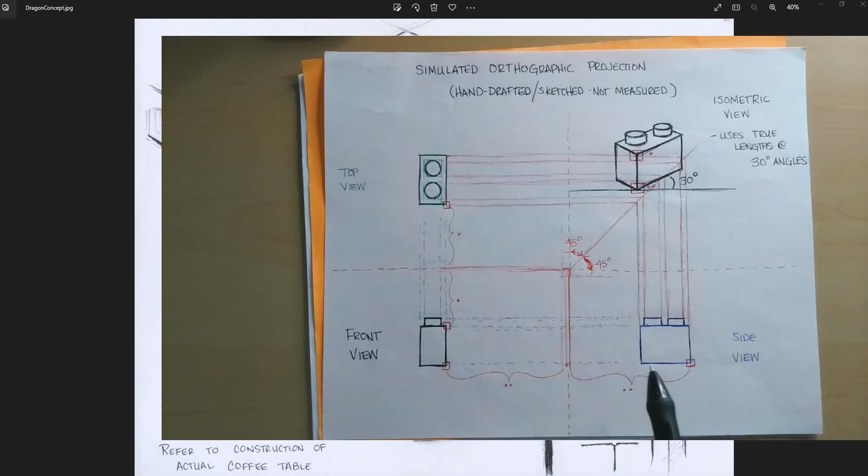So the whole concept of orthographic projection is it has three views to it: the front view, the top view, and the side view, and everything lines up through these three panels. Basically, if you took these three panels and folded them in, you would have the object sitting in the middle, with the projection screens and everything.

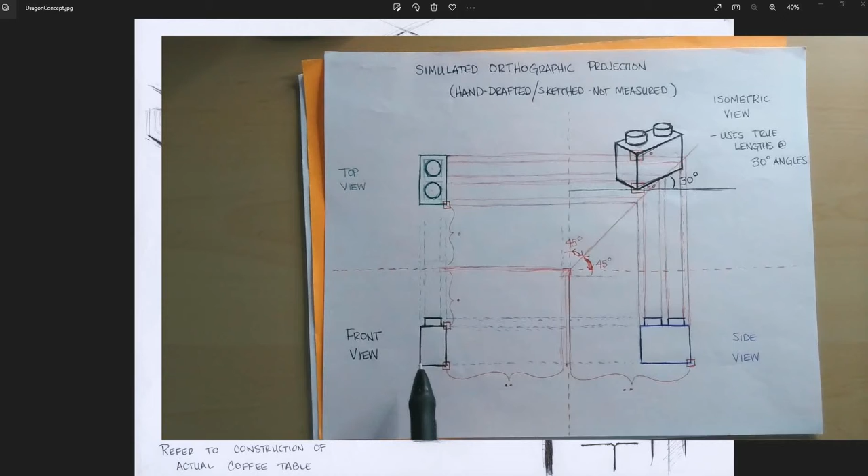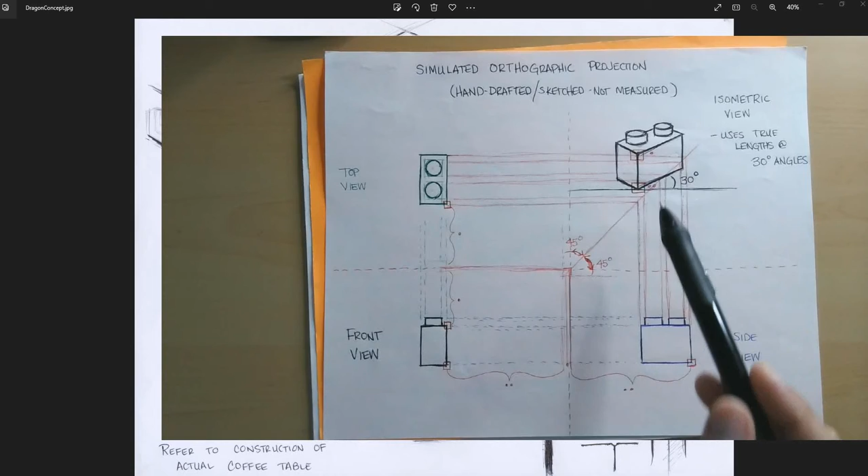One thing I'll show you in class is using acrylic to see how it actually projects to that plane, because that's a big key component. The front view is the front of this object, the top view is a flat version of the top, and the side view is a flattened version of the side of the object.

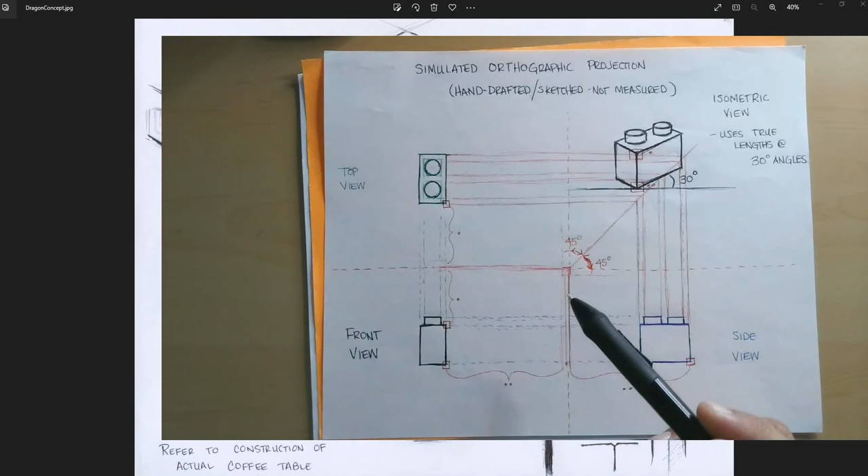Basically it's projected out to a plane in all directions, and the last component of an orthographic view is often doing an isometric view as well, so you can see that version of it. This is when you actually have a design document, you'd have these three views, and then you can have an isometric on it.

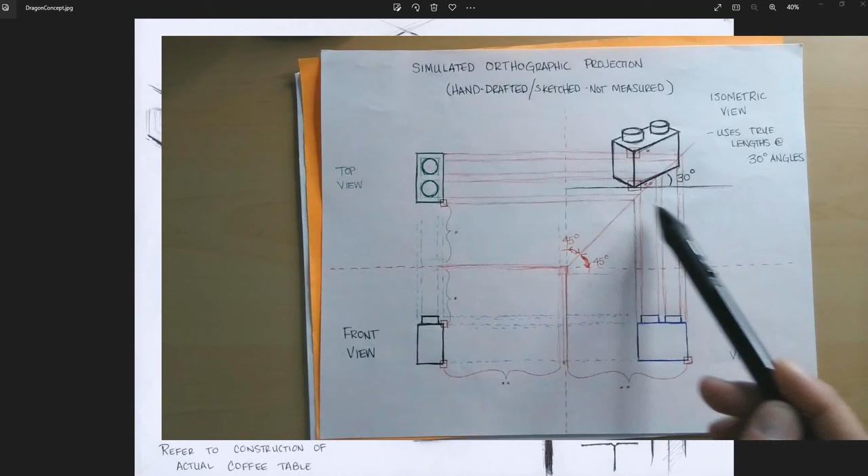The isometric is very specific as well, because with the isometric, these lengths are actual true lengths, and it's set up to where you have a 30 degree projection and stuff like that. It's really important to understand how all that's set up and how that looks.

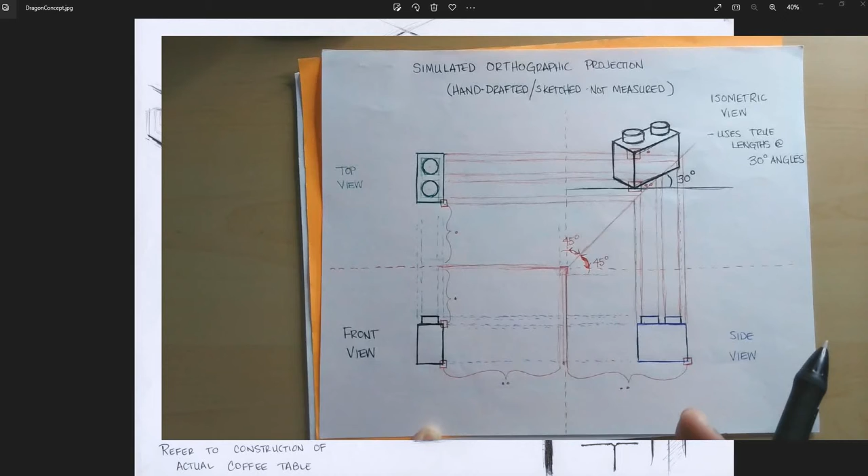As you create this, you'll notice that as it goes through, specific distances and lengths are all equal. Like you notice how this is equal to this right here, because it lines up to the corner of how it's actually folded, and that controls the imagery of it.

This corner is the same as this corner. This bottom corner is the same as that bottom corner, because that distance from there is the same as that distance from there, and that's how you actually line everything up.

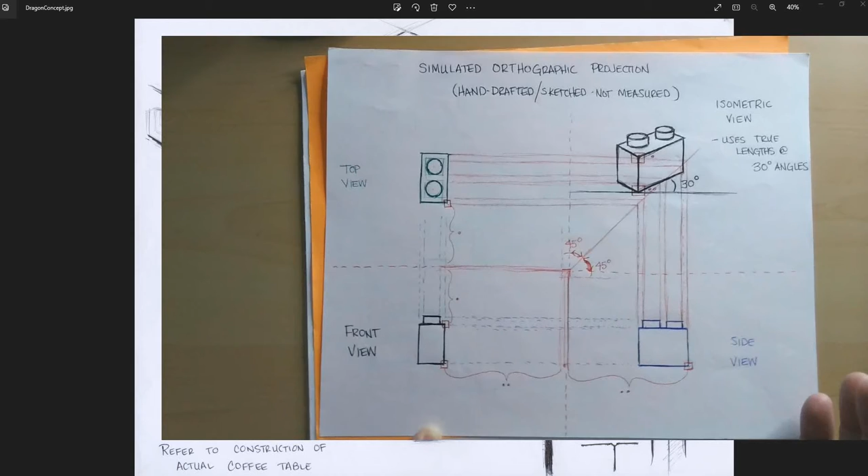Now, granted, this is all kind of sketched out, but if you want to know a little bit more information about it, we can actually sit down and go more in depth about it.

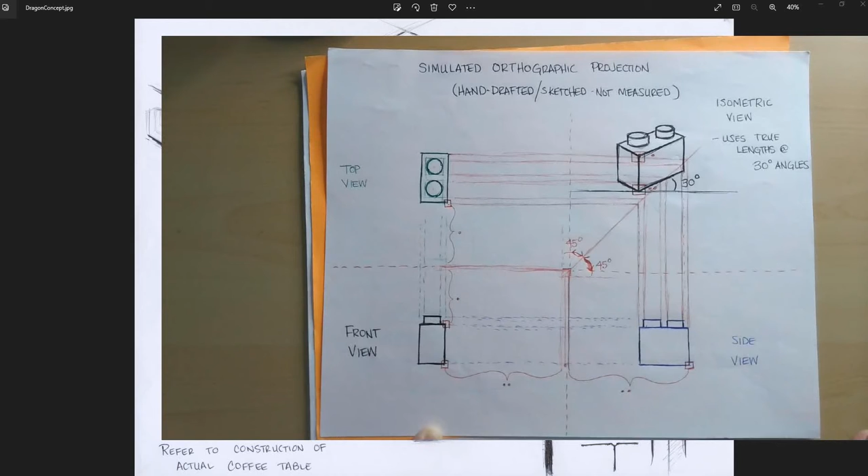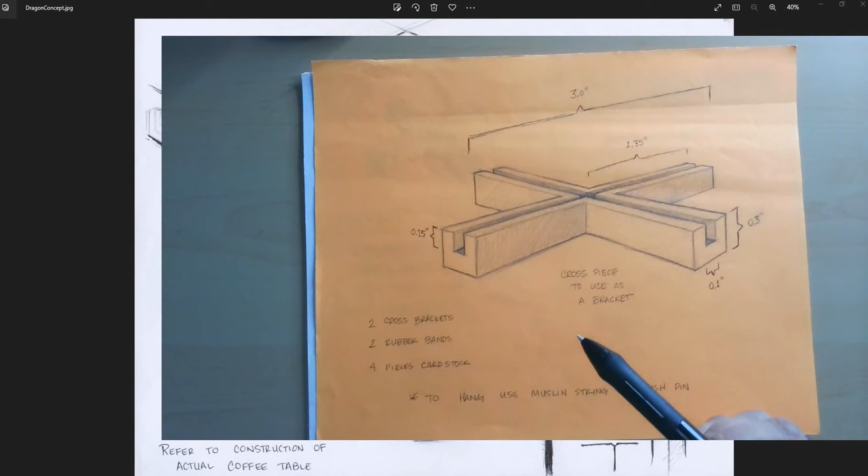The important thing to know about orthographic views is you can take them in the sense that you can make them a little bit more aesthetic. So there's that thing that's hanging down, and it actually has a little piece. I call it like a little bracket for making mobiles. But I came up with the concept so I could actually CAD it out.

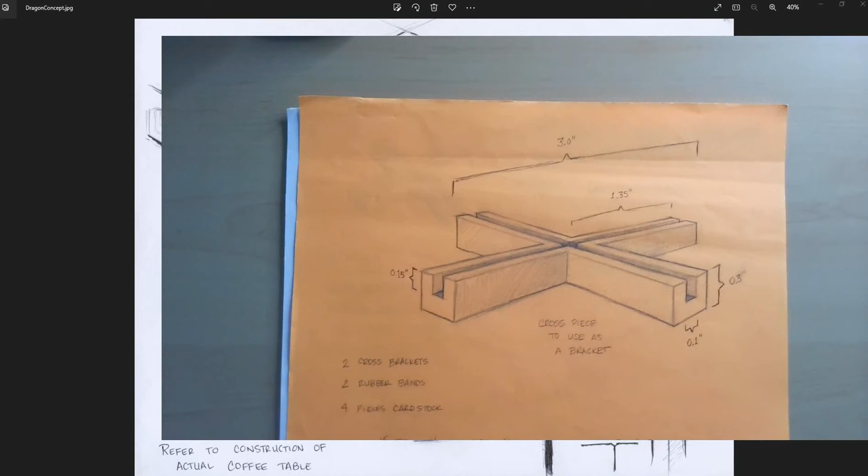So this right here is kind of like a more stylized isometric. This shows that bracket, what you can physically see that's on the mobile hanging in the classroom there. This is the direction you can take this concept of taking an isometric view from an orthographic projection, so you can make cool images in a design document.

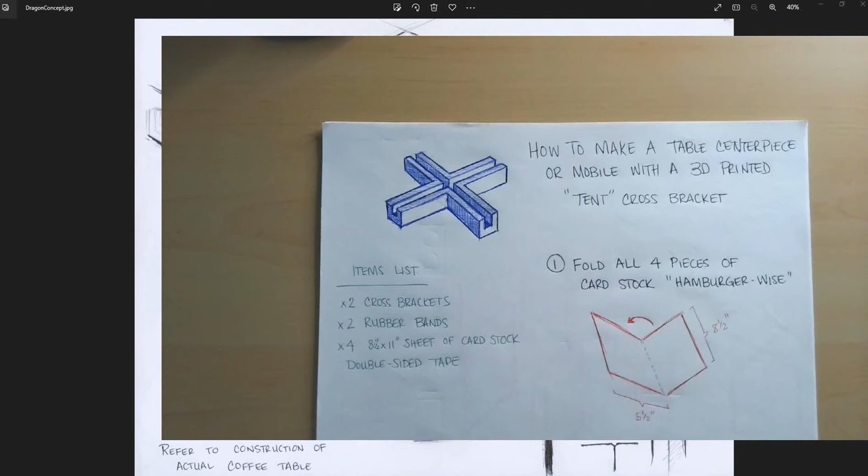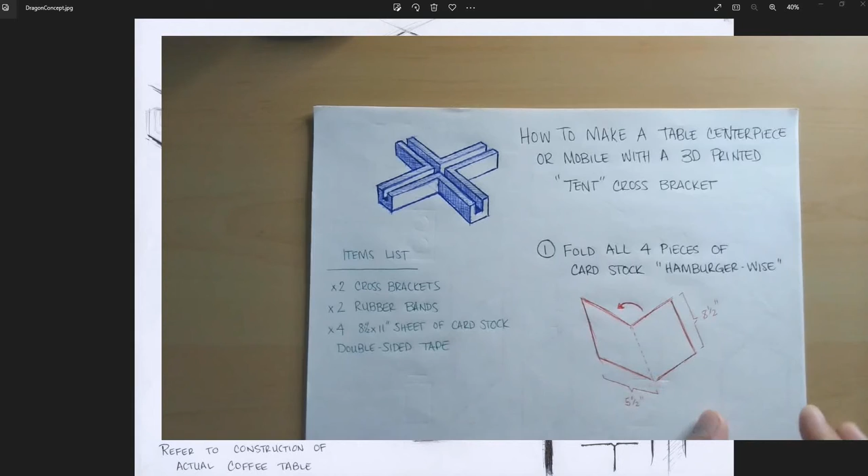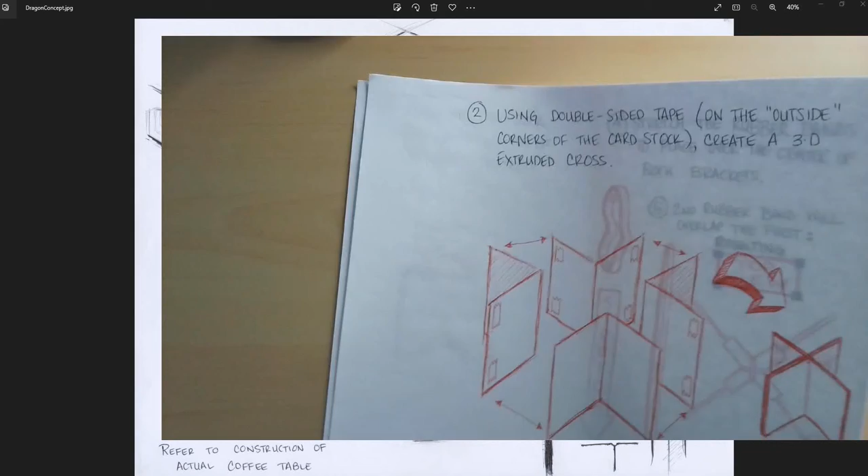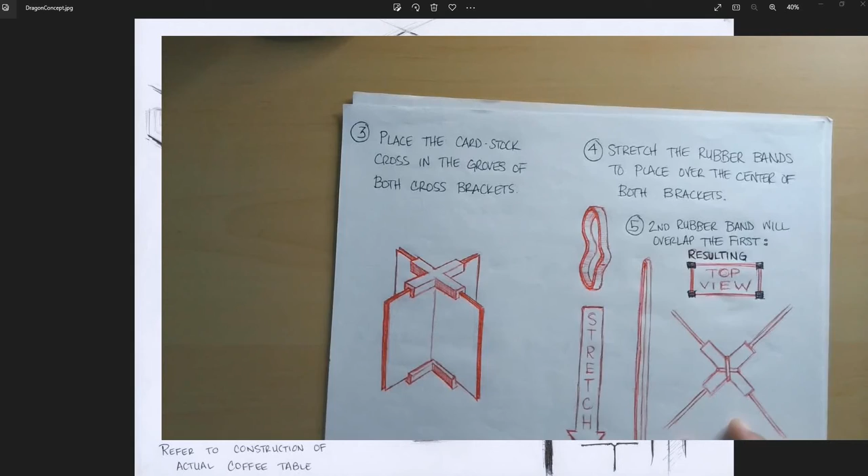So going along with that, you have a whole design document that talks about taking one of these brackets and what you can actually do with it, making it so you take four pieces of folded cardstock, put them together, and use your two design brackets. You put them together, stretch rubber bands around them, and you get that hanging piece you see there, plus some fun facts around it.

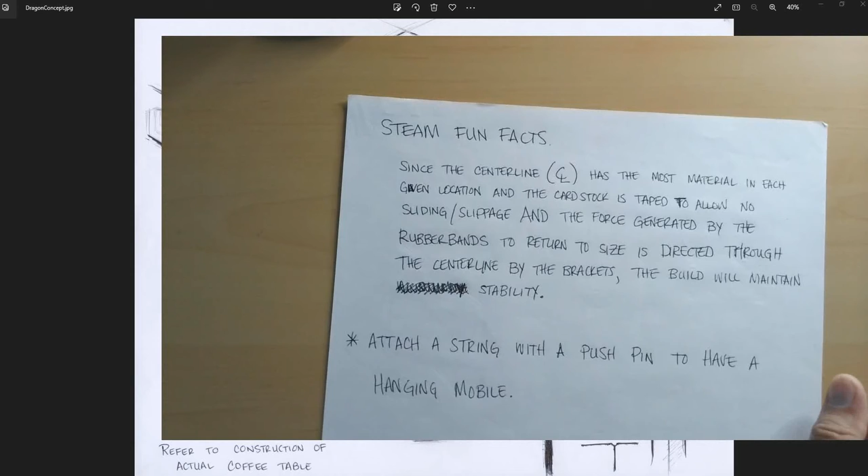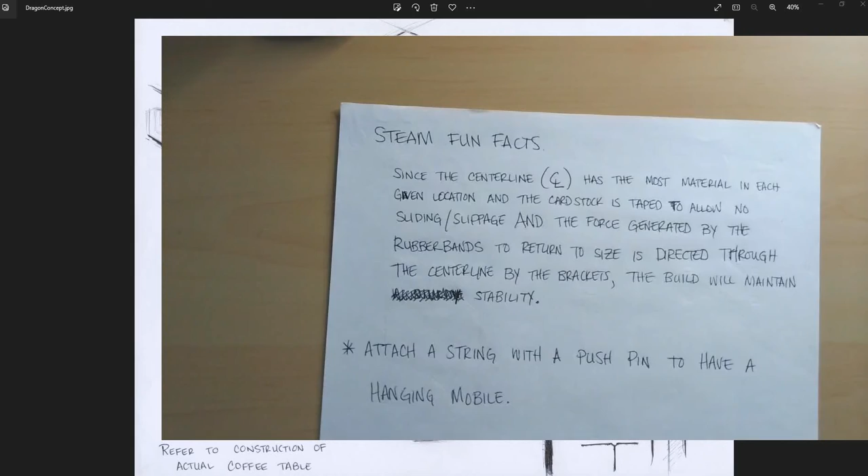The whole reason it actually works is because it centers the gravity over the center, and it keeps it all together with the two rubber bands holding it together, centralizing all that force in the center, where all the mass of that cardstock is, right there in the center. That's why it all works. Now conceptually, let's take this down.

Let me move the doc cam out of the way. In fact, we can actually— I wanted to start talking a little more about this. You can see the dragon table that's sitting there.

Coming up with a concept, first of all, looking at the corner of it, designing it in such a way that I wanted it to look like you're looking at a dragon's face. So coming up with that concept, still doing that isometric, doing this little insert right here, and talking about it.

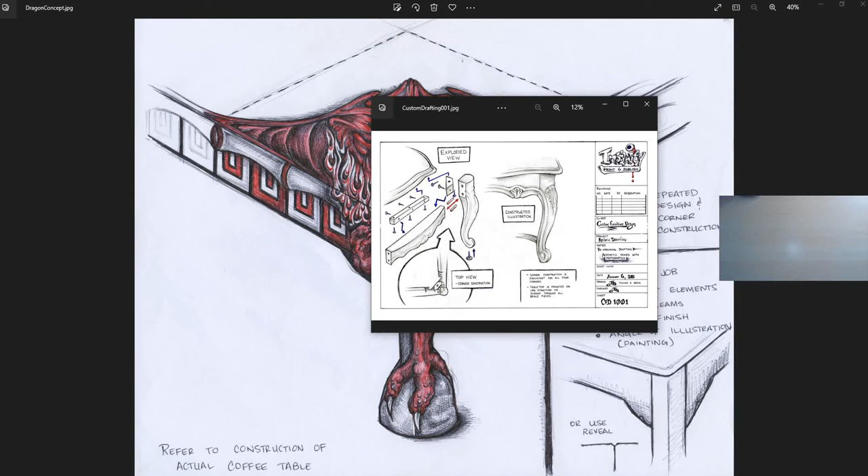But along those lines, it comes from actually looking at an actual piece of furniture that was designed in a similar way. I had a table at home that I looked at the corner of, so I could conceptually think about how to design the corner element of that table itself.

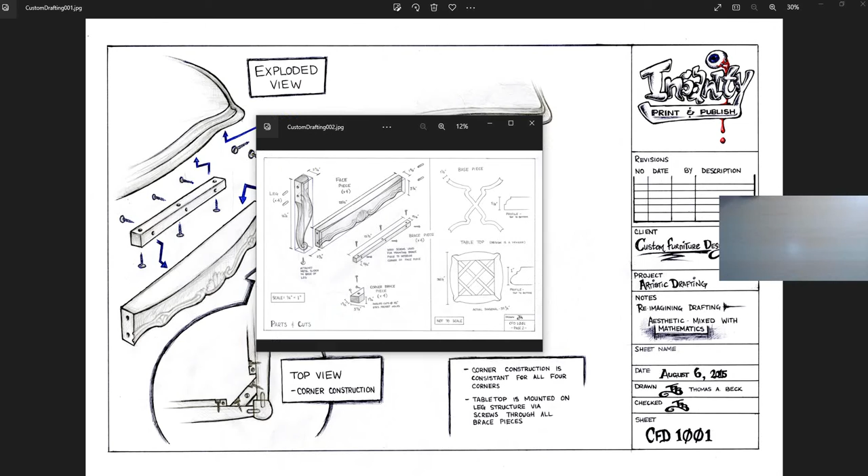So kind of breaking it down, doing an exploded view, and looking at that, so I could actually do the construction of that corner. And then here's a little bit more about the design of the table itself, looking at that.

But here you can actually see that these are all set up in specific isometrics, so you have the 30-degree angle, actually setting it up as a design document itself.

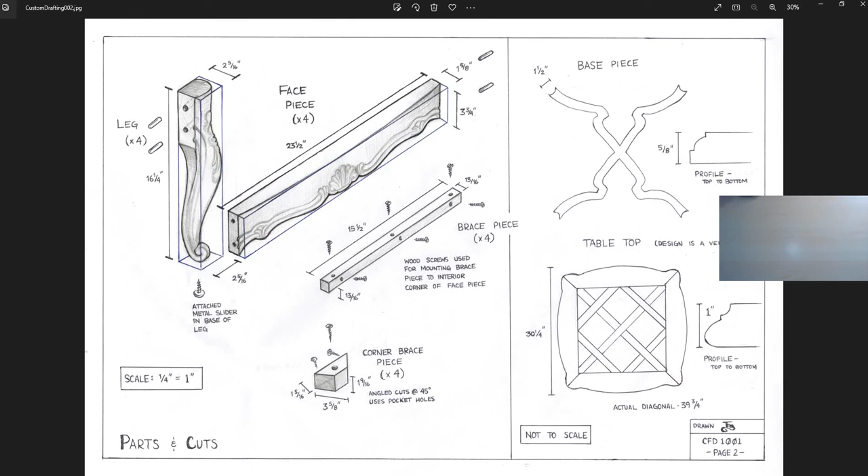But I wanted to show you these because this is the concept of what I wanted you to do for your term 2 project. It doesn't necessarily have to be a table—it could be anything—but the process of looking at something and creating some cool looking design documents on something you actually want to develop, going through the process of actually looking at it.